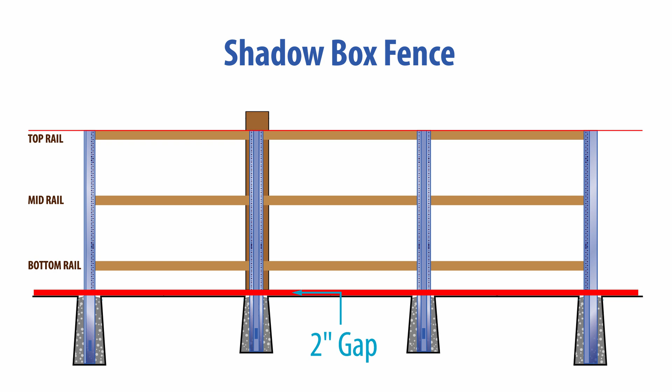Need help installing your new PostMaster Plus fence system for a shadow box fence? The PostMaster Plus posts for a shadow box fence are different as they come up to the top rail. Be sure to leave 2 inches extra post length to account for ground clearance. Here's a quick 5-step walkthrough for installing a shadow box fence.

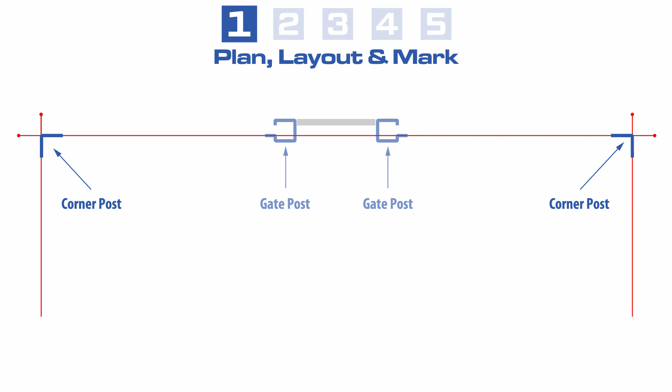First, locate your property's boundary lines, then stake the locations of each corner and gate post well within the property line. Line posts should be spaced the length of your rail, up to 8 feet plus 2 inches on center.

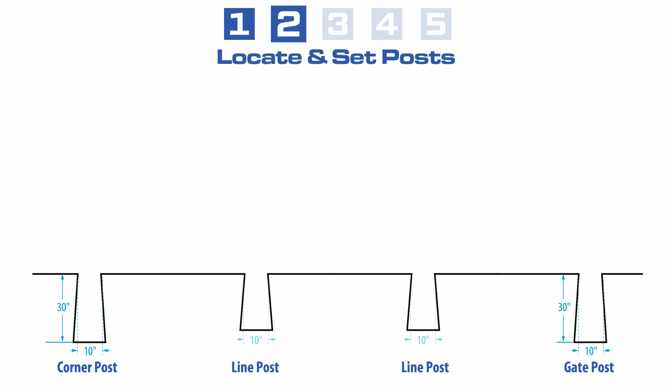Second, locate and set the posts. Dig the corner and gate post holes about 6 to 10 inches in diameter and 30 inches deep. Line posts should be 6 to 10 inches in diameter and 24 inches deep. The height of the fence boards should be 8 inches above the top of the top rail and 8 inches below the bottom of the bottom rail.

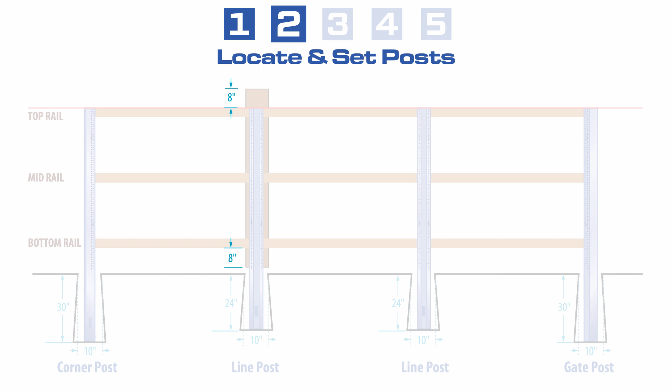Make sure you line up your posts next to the holes, understanding that when you place the posts into the hole, you'll line up the flanges across the string line as per the drawing. Next, center the posts and fill with concrete to ensure stability. Make sure the posts are plumb, square to the fence line, and set to the correct height.

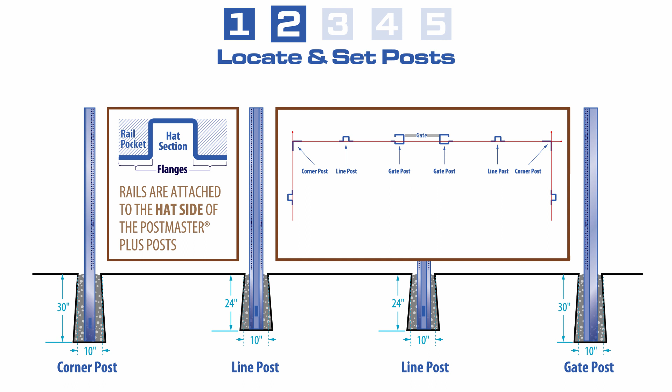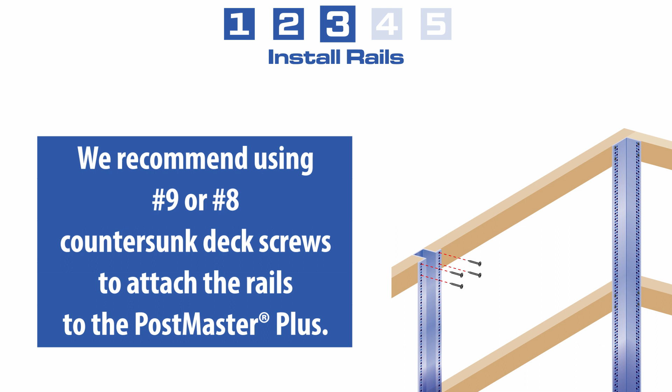Third, install the top, middle, and bottom rails alongside the hat section of the post. We recommend using number 9 or number 8 countersunk deck screws to attach the rails to the PostMaster Plus.

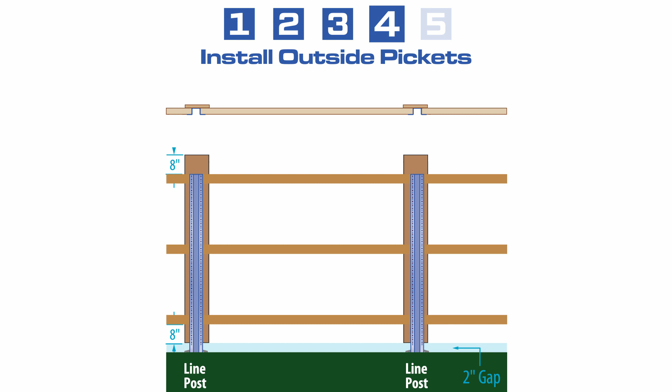Fourth, install the fence boards over the PostMaster Plus 2 inches above the ground. Then, lay out the outside row of fence boards, evenly spacing them with approximately a 3-inch gap, and attach to the rails 2 inches above the ground.

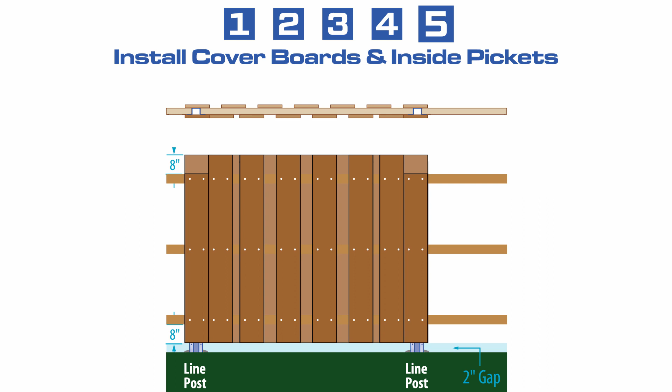Fifth, next move to the inside of the fence. Install the 1x6 cover board over the PostMaster Plus 2 inches above the ground. Then lay out the inside row of fence boards, making sure that you cover the 3-inch gap, and attach to the rails 2 inches above the ground. Congratulations on a successful installation!